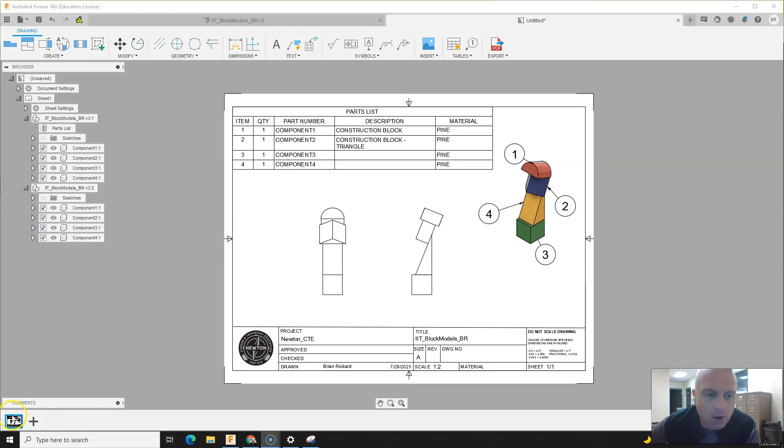All right, the next thing we're going to look at is a detailed drawing for each of the parts of your construction block assembly. So over here under the little plus tab, I'm going to click to add a new sheet. That just adds a new sheet to the same file. And I'm going to go ahead and click base view again, which is looking to bring in that model, that assembly model.

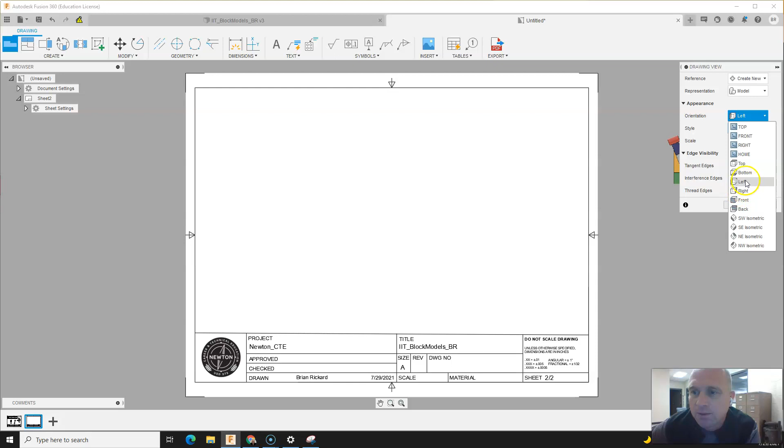In this case, I'm going to pick the left side view. I'm going to make this come in at a scale of 1 because we're just going to be showing one of the parts. So I click to place that view, and I'll click OK and it places the view in here.

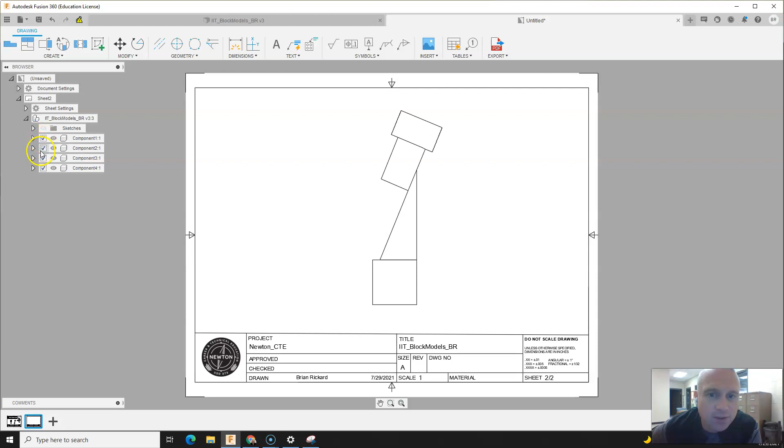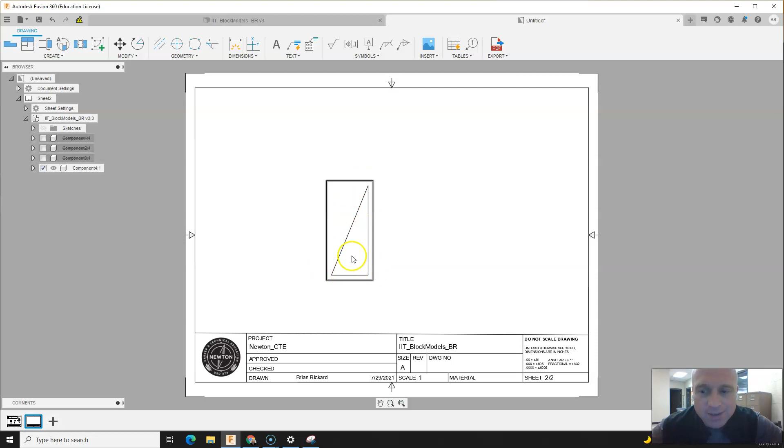Notice that the components here can be checked and unchecked. So I'm going to uncheck all of the components except the triangle component. This is what we would call a front view of our object, and the reason it's the front view is because it shows the best detail or the shape of the part.

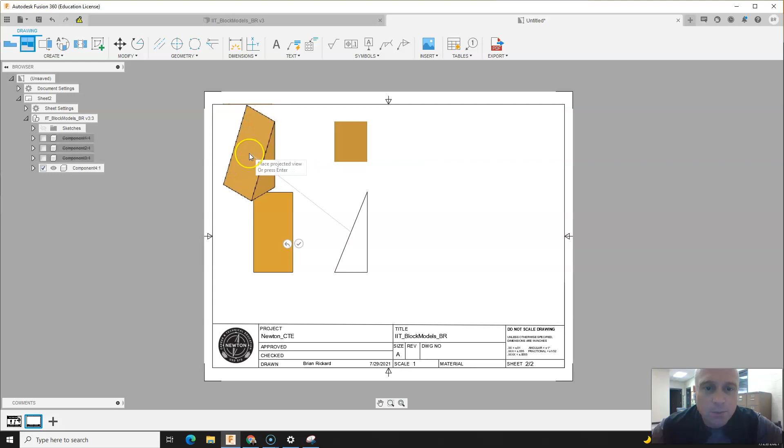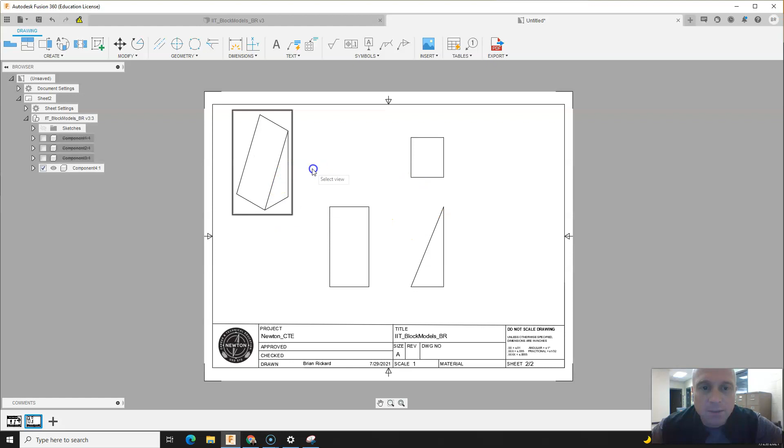And then I can edit them. So I'm going to click to edit this isometric view, and I'm going to make it shaded. Then once I have the views that I need for my part, I can go ahead and start dimensioning that.

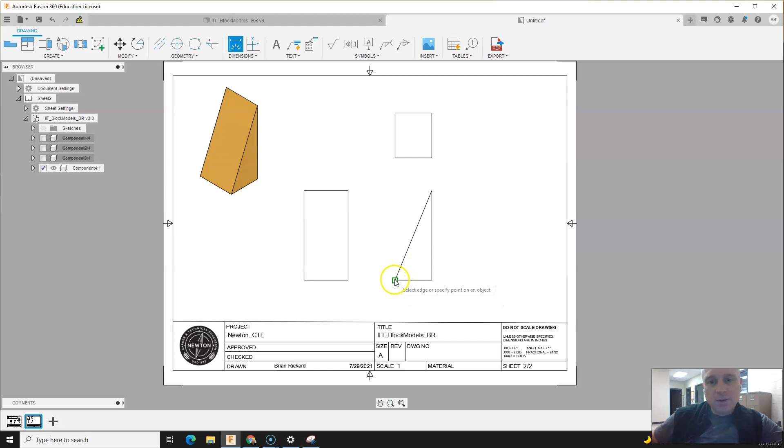I'm going to use the dimension tools over here, and I'm going to start by dimensioning the front of this object. Notice I'm getting thousandths as my dimension. We need to change our document settings so that they're in millimeters.

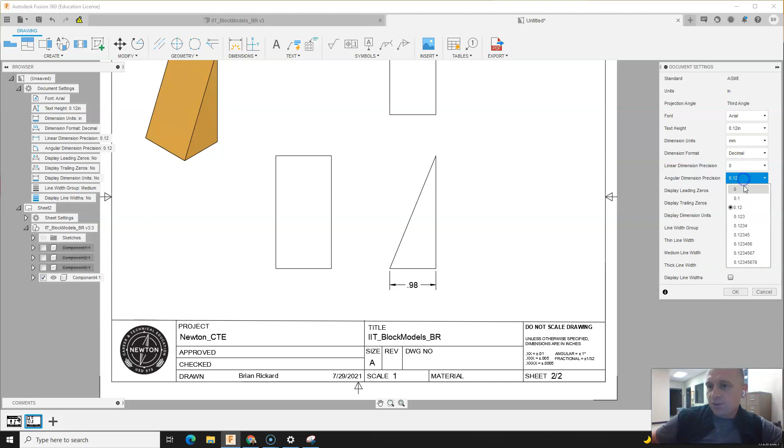So I'm going to click over here to document settings. I'm going to click on dimension unit, and I'm going to change that dimension unit from inches to millimeters. And then I'm going to change the precision to 0. So then we have this drawing in millimeters.

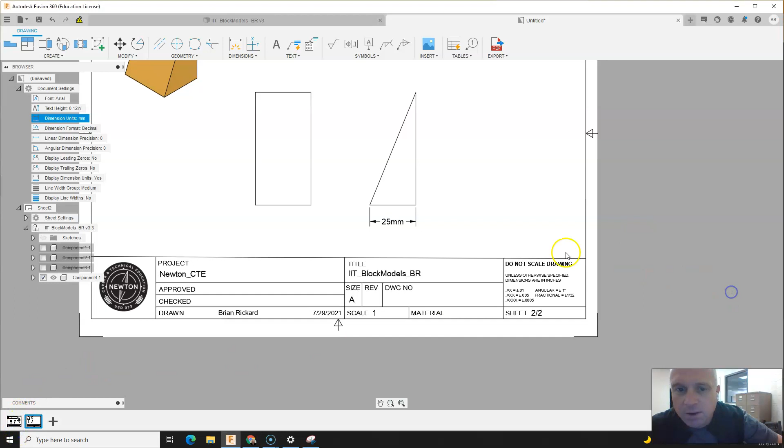Notice on our note down here on our drawing sheet, it says unless otherwise specified, dimensions are in inches. So we probably need to add something to that to denote that these actually are in millimeters. So I'm going to go ahead and click to add the unit to the dimension. I'll click that little checkbox there, then it adds the unit to the dimension.

So that is my width dimension. I have the height of my object. I'm going to go ahead and click to place that dimension. And then the last dimension I have is the depth of my object, and the depth of my part is right here. I'll go ahead and click to place that.

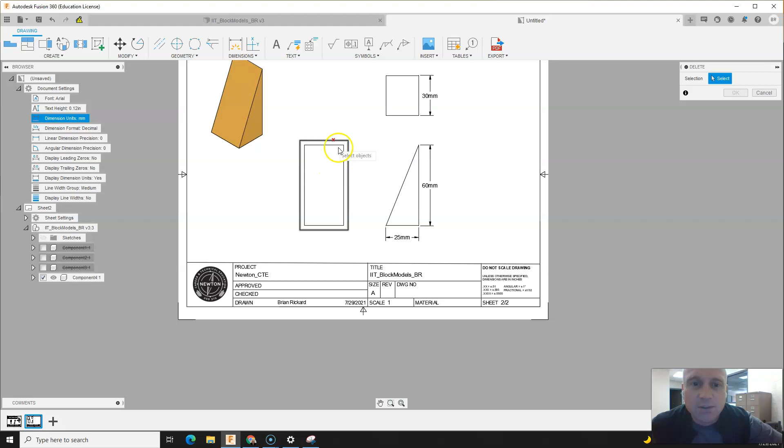Notice that I don't have anything on this left side view, so I'm just going to click and delete that because we don't need it, since there are no dimensions associated with it. So for our part here, we have the overall width, the height, and the depth. This is our width, this is our height, and this is our depth dimension. All three of those dimensions have been added to our drawing, so this drawing is complete. You'll want to create a detailed drawing for all of your parts.